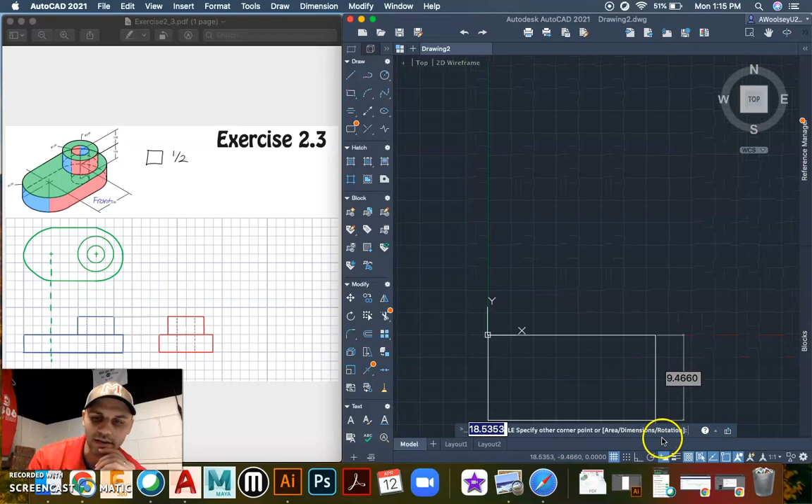So let's start off first in AutoCAD with the rectangle tool. I'm going to type in rectangle, and just like our last drawing, I'm going to start it off at 0, 0. And once again, you probably noticed I have relative coordinates on, so everything is based off of the last point I did. So if I started here, I now need to get to here, which I can count the boxes, and figure out each box equals 1/2 of an inch.

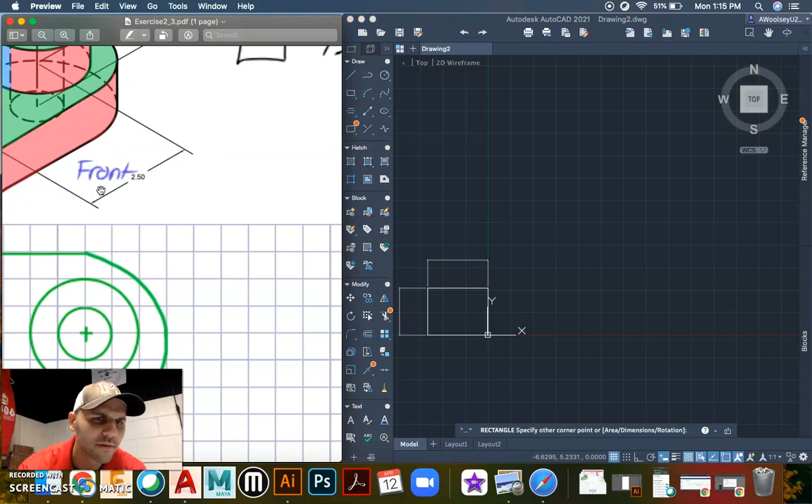Or if I zoom in on my drawing here, I can see it's 2.5 from here to here. And then if we remember, the radius was on the end here. So the radius was 1.5, and then 1.5 here as well. So 1.5 plus 1.5 is 3, plus 2.5 is 5.5.

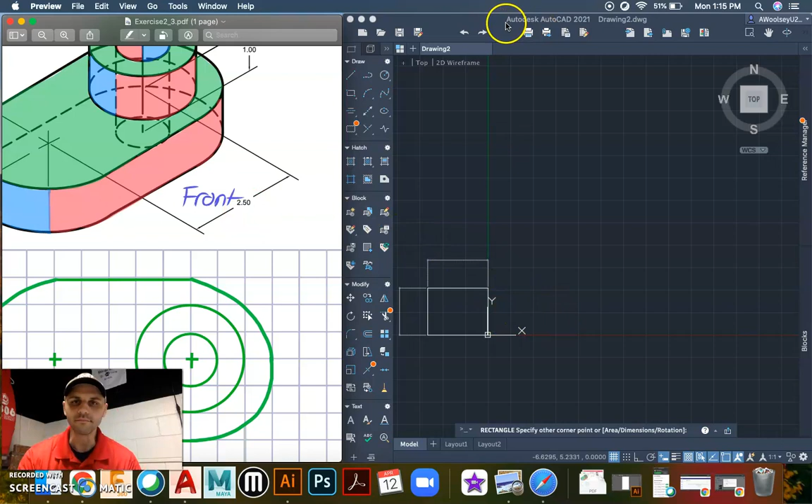So I'm going to go 5.5 over. And then I have the height here, which I can just count easily as 2 boxes, so it's 1 unit. Which we can see in our drawing here, 1 on top of 1.

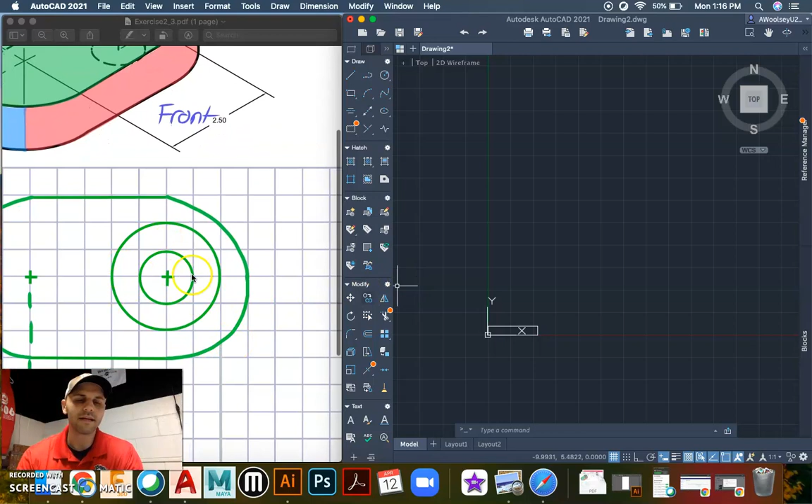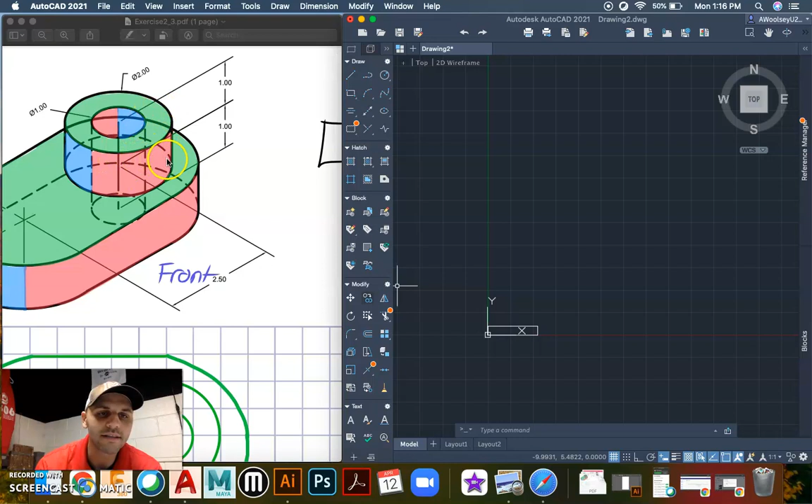I'm then going to draw my next circle on here, which has a diameter of 2, and it's 1 unit up. And since it's sharing the same center point as this outside arc here, they're kind of concentric, sharing the same center point. Since this is a radius of 1 and this is a radius of 1.5, I can tell it's 0.5 in there.

So let's zoom in on AutoCAD here, and we'll kind of fix up our drawing of what we're trying to make. So now I have to figure out, where is this going to start?

Well, it's another rectangle, and there's certainly other ways to draw this. It doesn't have to be this way. And now I need to figure out where this corner is.

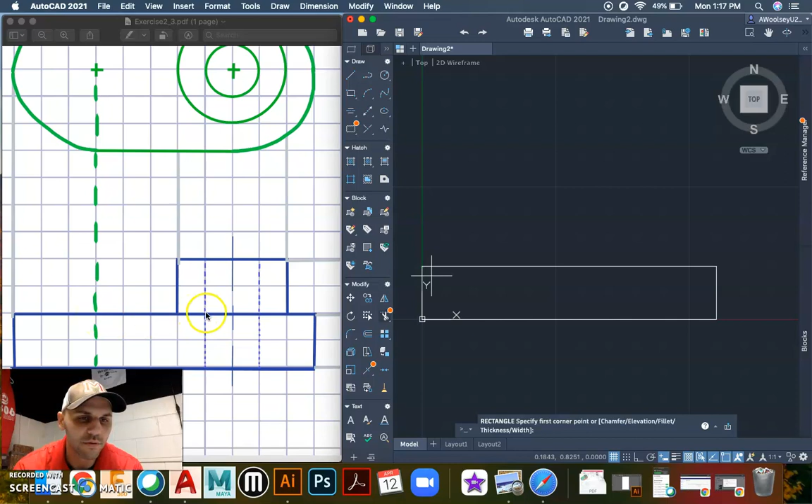So if I take 1.5, that would bring me to here, and then we knew the middle was about 2, which brought me to about here. I think something might be a little bit off about this drawing as well. Oh, no, it's 2.5 — I'm wrong. So it brings me to about here. So 1.5, 2.5, that makes sense.

So now if I go 1, 2, 3, I can see my first corner is going to be 3, comma, 1, because it's 1 unit up from where the origin was. So now I'm going to go over, and I'm going to go over 2, because that is the diameter, and go up 1. So I get this nice little rectangle.

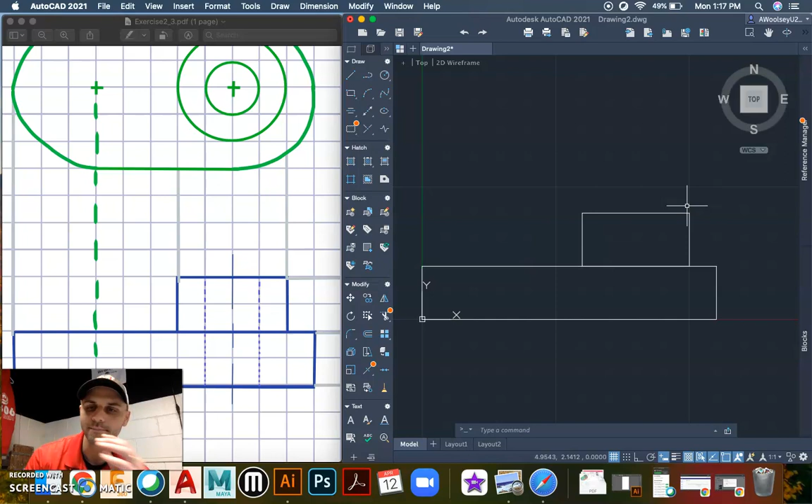And now I get to draw some lines in. Many ways to do this as well. I'm going to try to do it the easier way. So I'm going to go to the line tool. And I can tell this was over.

Okay, if I did the math here, this is going to be at 2.5. It's going to be at 4, which is going to be the center. So if I come back 0.5, that's going to be 3.5. 3.5, comma 0. And then I'm going straight up 2, so 0, comma 2. And now this, I don't want to do that math again — it caught me on the spot there.

So I'm going to offset this, and I want it to be 1 unit apart. So I'll type in 1, enter, and then go to the right. And sure, yeah, we'd like this to be a hidden line, and we'd love to throw in a center line, but it wasn't mandatory, so we're not going to do it at this point.

I like to put this in just because it makes a little bit more sense to me when there is a line running down the center.

Okay, so now I'm going to move on to my top view. So I go back to offset.

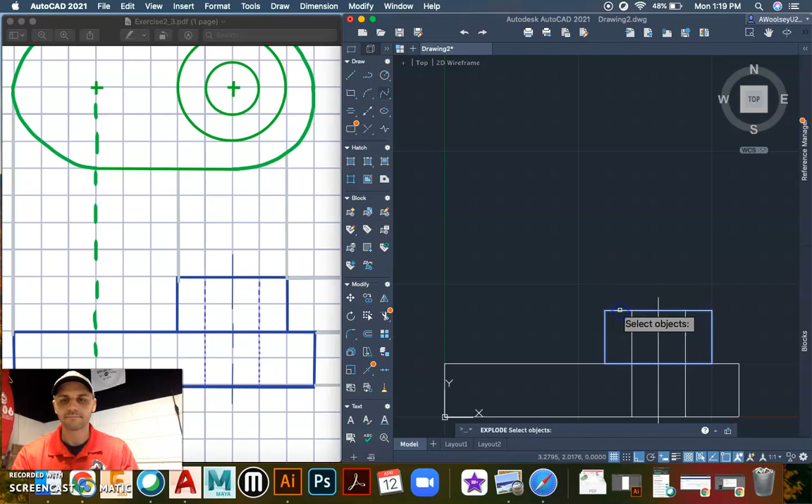I'm going to offset 1 again, just like we did on the last drawing. And when I go to offset 1, okay, it offset the entire object. So I have to explode that rectangle. And now when I go to offset and type in 1, I can now go up. And I can go over. Oh, nope, got to explode again.

I could spell explode right. I'm glad it's auto-correcting me there.

Okay, 1, go over. Okay, so now I can have my set distances here that work for me. So now I'm going to work off of my drawing, and now I'm going to start to draw out some of these circles. Okay, so I'm going to have to bring some lines over and bring some lines up. So the way I'm going to work this is I want to make sure that I'm going to start out with a rectangle, and then I'm going to fix the rectangle.

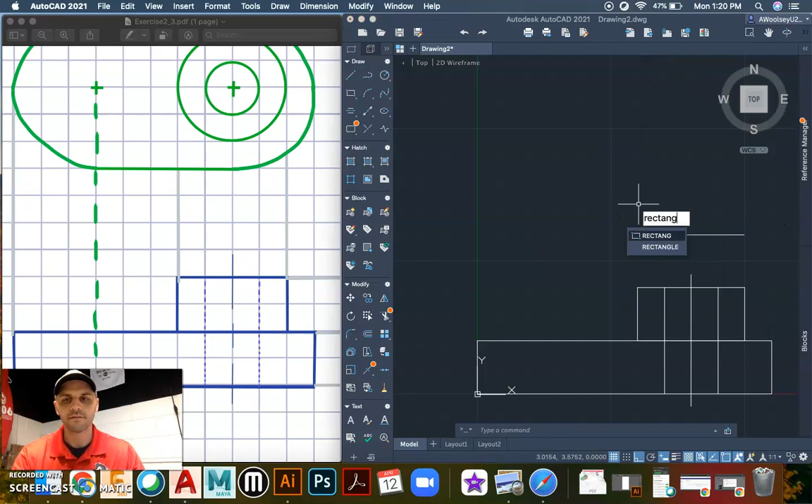Okay, so I'm going to go to the rectangle tool, and then I'm going to go up. Okay, and if I count my boxes, it's 1, 2, 3, 4, 5, 6, 7, 8. Okay, so 0, 8. Oops, that's wrong. It's actually 0, 4. Maybe something looked wrong. Okay, 0, 4.

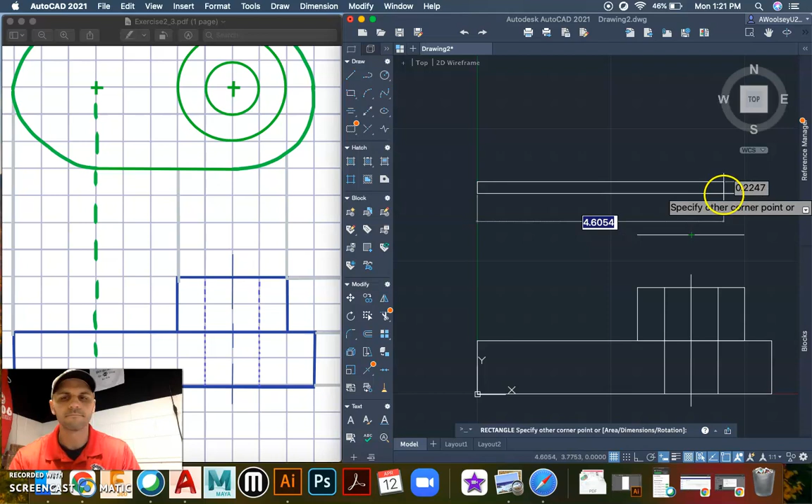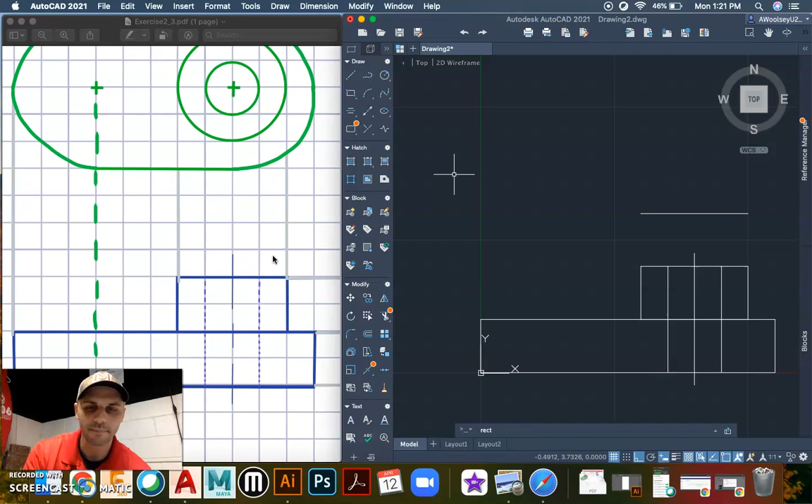It's funky. So when I look at this, oh, because I'm only 3 up. Oh, man. I'm all over the place today. Okay, I actually had gone 3 units up in this drawing, so got to fix that. Okay, so it's actually 0, 3. Okay, and then I can see that it's going to be 1.5 wide.

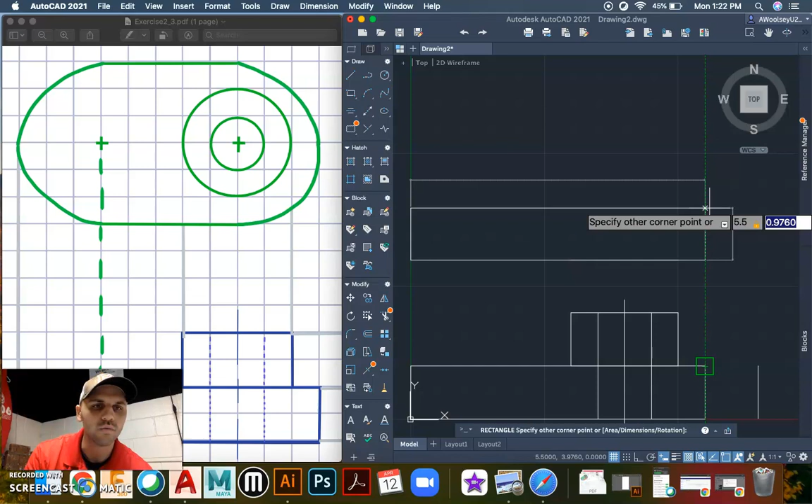Okay, so I'll type in my total distance. Okay, which we figured out was 5.5, so 5.5, comma 1.5. That can't be right. Okay, how wide is this thing? Okay, it's 3 wide. And now I'm going to start to draw out some of my circles. Okay, so I go to my circle here.

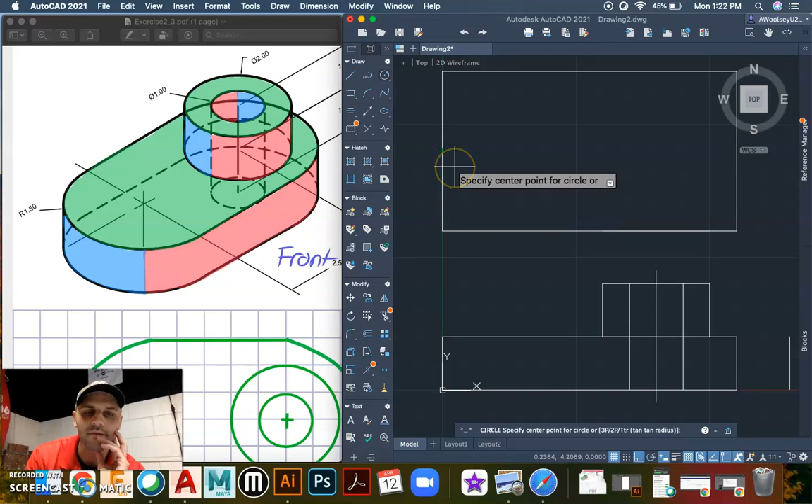Okay, I need to figure out where this is supposed to be. So we figured out it was 3 up. So if I split that difference here, okay, it's 3, 3.5, 4, 4.5. And then I'm going to go in 1.5. So 4.5, comma. And it's going to be, nope, that's wrong. Why am I all over the place? I need somebody to help me here and talk me through it. 1.5, comma, 4.5. Okay, and then I'm going to come out to the end.

And I'm going to do the same thing on my other side here. Okay, and I could probably do this a different way, which would be kind of cool. I could actually do a circle command and do a 3-point. And then I could click on the tangent points of all 3 of these sides, and I would actually get the same exact shape. Kind of a cool thing to try out.

Okay, and now I go back to a circle, and I'm going to put a circle on this same center here. This time, though, it's going to have one that's got a radius of 1. And then I'm going to have another circle on the same center that has a radius of 0.5. Okay, and now I'm going to do some trimming. Type trim, enter, enter again.

And now I can start to trim away the parts of this shape that I do not need, which are quite a few. It's a lot of this shape that I really don't need. It was just kind of like the scaffolding to build my object here. Okay, so got that here. These two, of course, I couldn't delete, so better get them deleted now. Okay, and there is my top view.

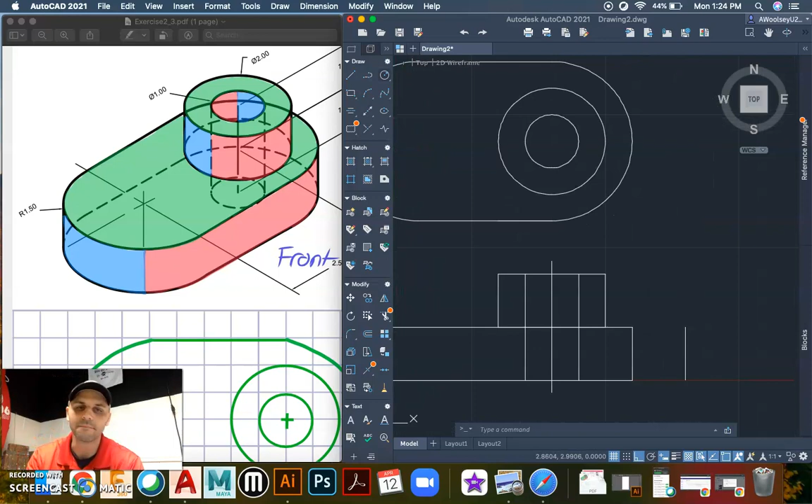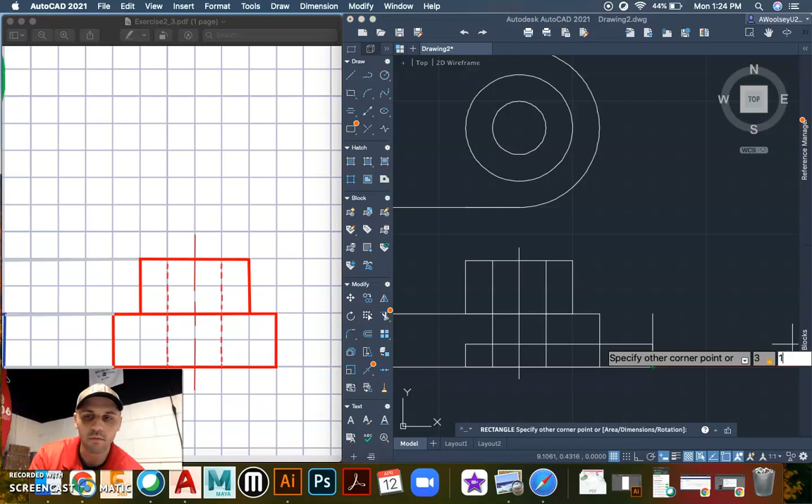Now, in a speedy way here, because time is running out, I'm going to do my next drawing here. So we can see it is a rectangle once again, so rectangle. From this corner, it's over 1, 2, 3, comma 1. And then there's another rectangle on top, so I'll go back to the rectangle tool. Okay, and can kind of work off the center, kind of can't. A little bit of trouble here, but we'll figure it out.

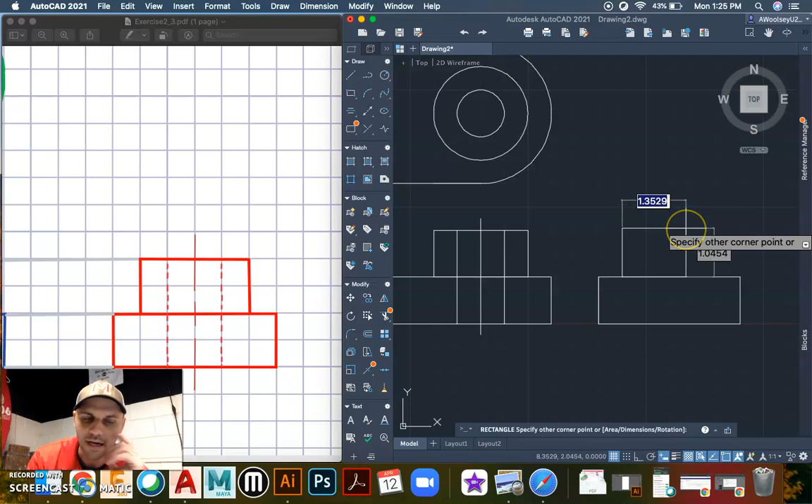So it's 5.5. Okay, 6.5, and then we're over, so it's 7, comma 1. And then we can see it's going to be over 2, and it's up 1. And then we have some line commands to do. Okay, so this line command is going to start, if this was once again 6.5, 7, 7.5, so 7.5, comma 0. And then I'm going to go up to the top, which is going to be 0, comma 2.

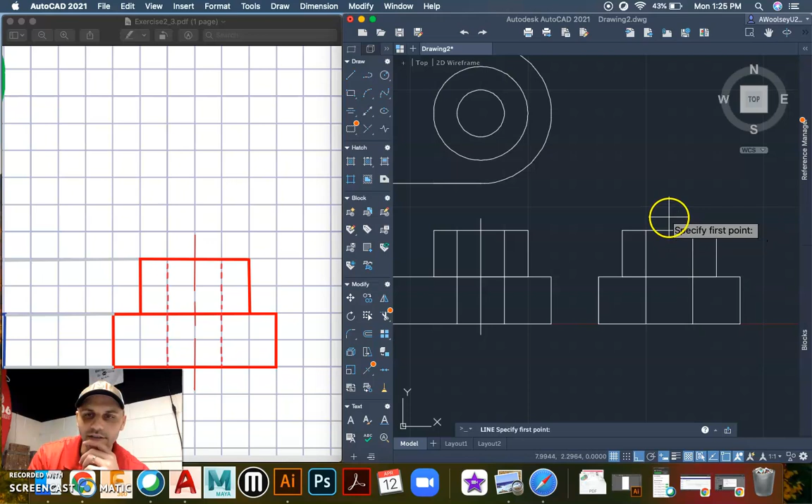I then offset 1, and I'm going to go to the right. And then for me, I just really like to put this line in here. You really don't need to, okay? But there it is, exercise 2.3. Okay, we created our drawing based off of exercise 11 or 2.3. Okay, hopefully this video was helpful for you.